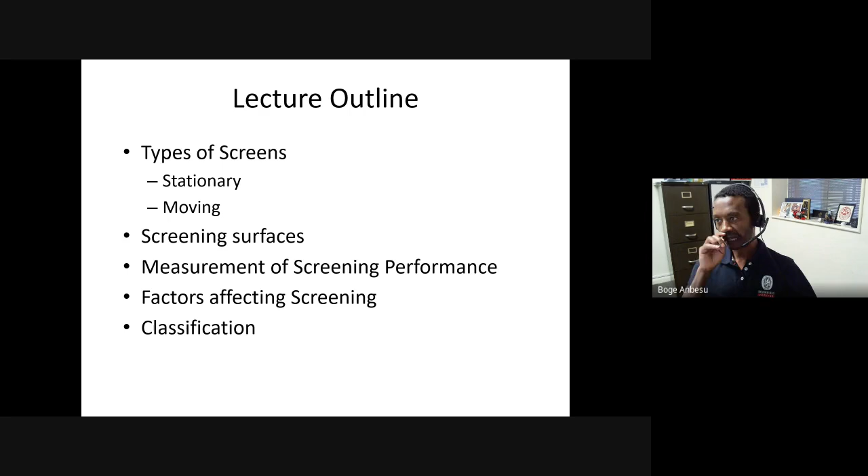Okay, so just keep that in mind when we go through this discussion. But some of this can be transferred and related to other applications, some may not be, some is restricted to mineral processing, but regardless, my focus will be just on aspects related to mineral processing. So we'll talk briefly about different types of screening, and probably focus more on screening operations, what type of surfaces you use during screening of mineral ores, and factors that may potentially affect the performance of a screen. Classification will be a main topic for next week, but this week I'll just briefly touch on some of the theory behind classification. So keep that in mind as well.

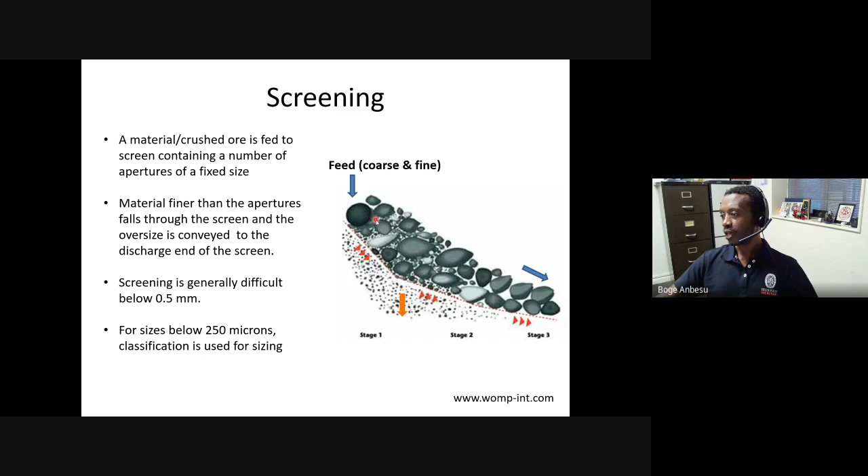So to put things into simple perspective, when we say screening, all we're trying to do is put a screening surface, feed coarse material that should flow over the screen, fine materials should pass through the screen, and basically we split the feed into fine and coarse. That's just the basic principle. There's nothing to it. The fines come down here and are collected as undersize, and the coarse makes its way all the way over the screen surface and is collected as oversize.

When do we use screening? Typically we use it for particles that are larger than 0.5 millimeter, so particles coarser than 500 micron. If your particles are smaller, say around 300 micron, 100 micron, and so on, we don't actually use screens because screens are not efficient for fine particles.

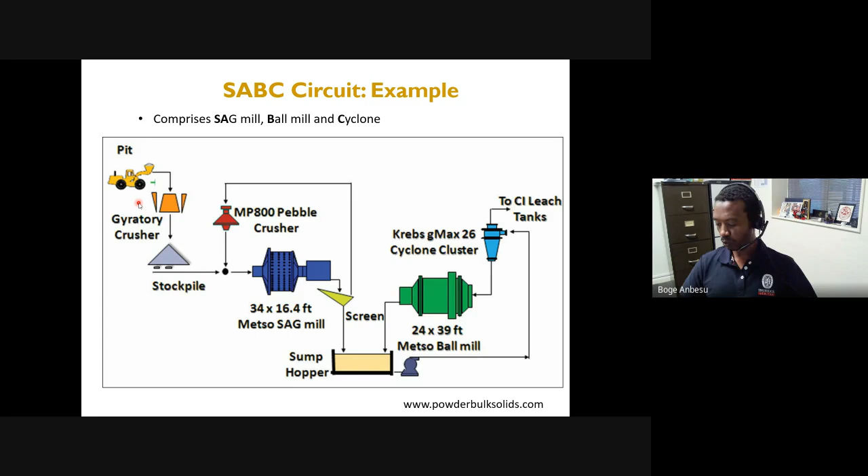In that case we use classifiers. That's why in that previous circuit I showed you, we use classifiers with ball mills, because we know particles are fine there. And we use screens either in the case of primary grinding discharge or in the case of a primary crusher feed, because we know screens work well for coarse particles.

At fine particle sizes, efficiency of screens is very poor because you would need very fine apertures, very fine openings on the screen. And when you're trying to operate the screen at that fine particle size, you blind them very quickly and the efficiency is very poor. That's why classifiers are preferred when it comes to fine particle sizes.

So when do we use screening in a typical mineral processing operation? It could be that you have very light gangue material and small, dense, valuable material, for example. In that case, you can use a screen to separate one from the other.

We can use screening to segregate particles into different size fractions, especially if there's some association between value and waste with size. Sometimes the gangue deports to very fine sizes or very coarse particle sizes based on what kind of material you're processing. In that case, you can put a screen to get rid of the gangue material as quickly as possible.

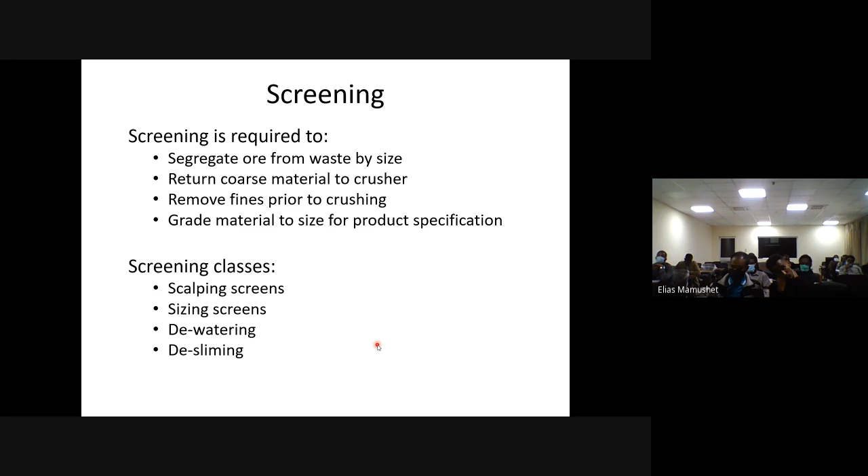If you have, for example, clay materials, very fine materials that are essentially waste, you could probably use a screen to upgrade the ore very quickly. Or, as I said earlier, you want to recycle material to a crusher, removing fines before you crush. And sometimes when you do grinding, we want to separate coarse from fine and operate, for example, a grinding circuit in closed circuit with a screen, and things like that.

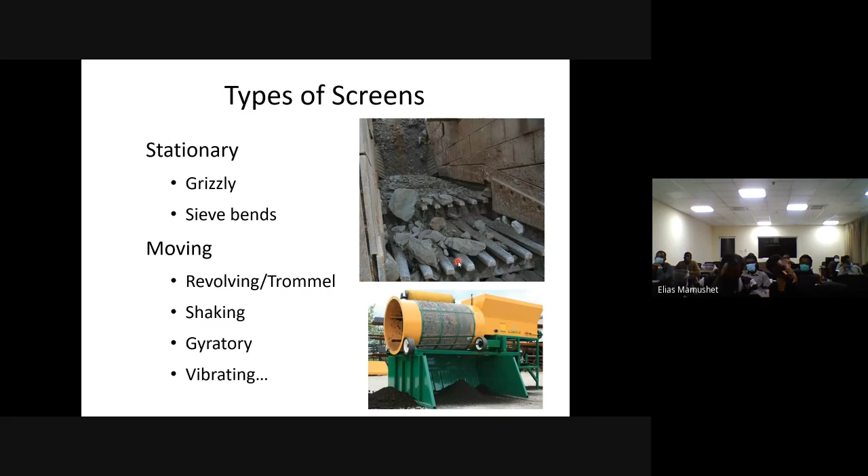There are different types of screens. I think you've probably seen some of these already, so I won't dwell too much on this. Some screens typically used in mineral processing operations are, for example, grizzlies, which look like these, with a bar or metal bar typically. These are usually heavy duty, thick bars used to remove fine particles before we feed a primary crusher. The idea is that they can handle very large rocks and therefore withstand that. They're more resistant to damage and wearing, and therefore can be used for heavy duty purposes.

Sieve bends are another example of stationary screening, where you feed the material from the top and the screen is somehow bent. Material falls on the screen, and the fine particles pass through while the coarse materials flow over the screen.

Some screens are actually moving screens. For example, you could have revolving screens like a trommel, shown here in this picture. The trommel revolves and you feed it from this end, and this is typically your screen. Coarse particles will be retained in the interior of this trommel, fine particles will pass through and are collected here, and coarse particles eventually pass over the screen and are collected here. So you have coarse and fine portions.

You can have shaking, gyratory, vibrating, reciprocating, a number of different types of motions applied to a screen, and typically that's used to improve the screening performance.

So as I said, I'm not going to talk too much about equipment specifically to screening, but if you guys want information about different types of screens, I can happily provide you with resources. I think this is probably covered in another unit. So what I will focus on is different types of screening surfaces that we use in mineral processing operations. Maybe you know some of them.

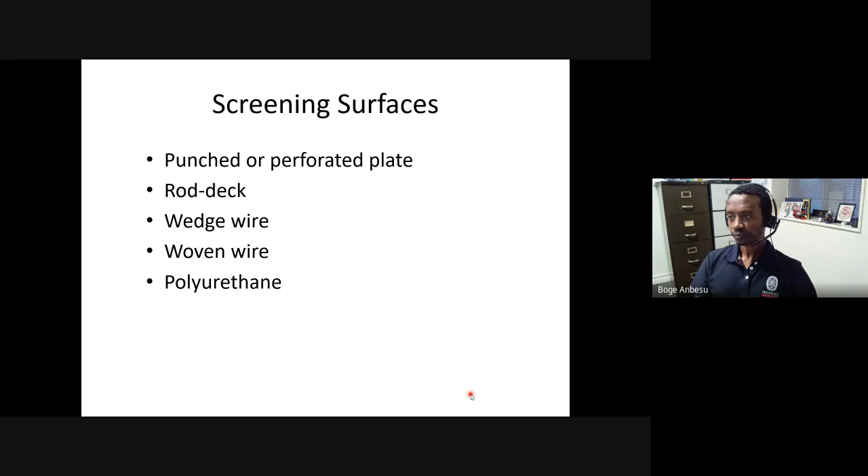Some screen surfaces are made from woven wires. Some screen surfaces are made from rubbers and polyurethane. Some screening surfaces are made from metal bars, as I showed you earlier. And even some can be made from a metal plate where you can punch holes on the surface of that metal. You can, for example, punch circular or rectangular holes on a piece of metal, and that can be used as a screen as well. So we'll talk about some of this in the next slides.

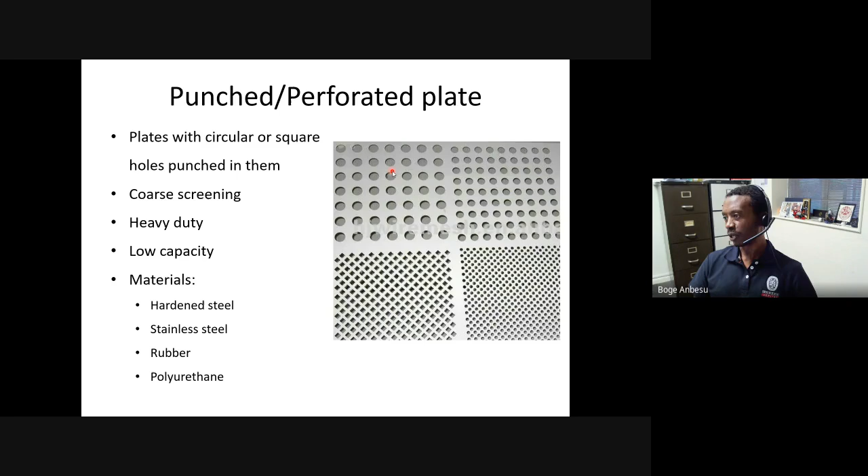If you have something like this for a screening surface, they're heavy duty and resist wearing, but the downside is that they're probably not higher in capacity, simply because, as you can see here, there's a lot of area where you don't have openings. Usually screen capacity is related to the open area available on the screen surface. So when you make holes, you will have open areas, but also there's a large fraction of area that's not available for screening. Therefore, punched or perforated plates usually have a lower capacity compared to, for example, woven wire screen surfaces. But again, the plate itself can be stainless steel or rubber, or any other material.

Again, the rod deck screen — as you can see in this image, you basically line rods in parallel to each other, and you feed material from this end. As the material goes down under the influence of gravity, fine particles will pass through and coarse particles will make their way here, and that's how we separate them from one another. This is a very common screening surface, especially, as I mentioned earlier, when dealing with very large rock. Heavy duty operations can be performed using rod decks.

And sometimes if you have lots of clays, they tend to be very sticky, and that means the screening operation is affected significantly because clays blind the screen surface very quickly. If that's the problem you have, then a rod deck screen is very good, as they have resistance to blinding and so on. They can be used for different types of operations, typically where blinding is a challenge.

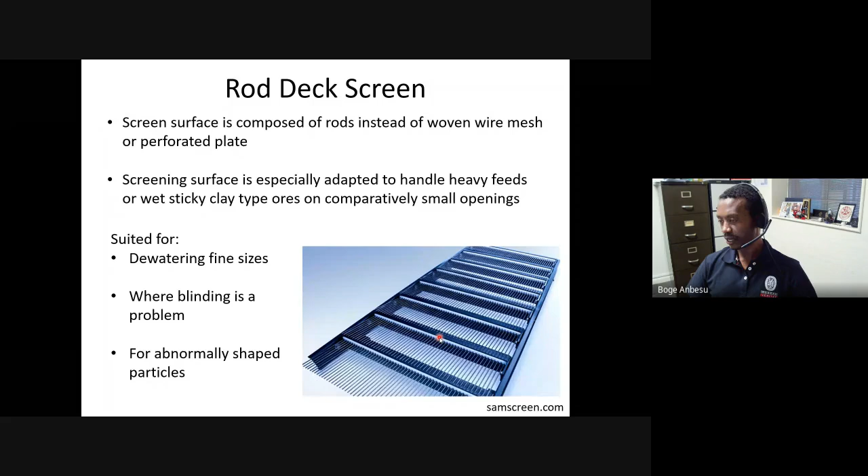Woven wire, probably this is more common in many places. Again, we just use steel, which is drawn into a wire, and then we weave the screen surface using those wires. This picture shows you what is actually going on. Basically, the wires are woven in a mesh-like structure, and the screening surface is simply based on the open area available between the mesh. This can be woven in different sizes.

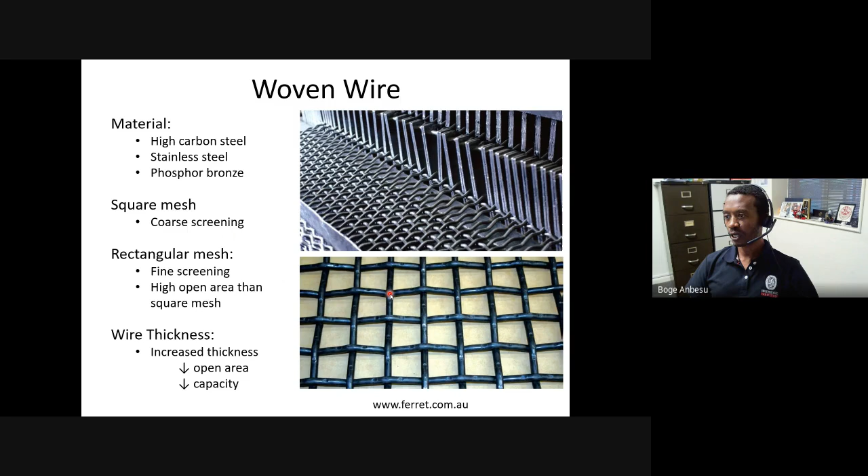These are some things we can do to improve screening operations. The wire can be in a square or rectangular shape, and usually square mesh is well suited for coarse screening, while rectangular mesh is suited for finer screening.

There are a couple of advantages. The polyurethane surface, compared to rubber, is a bit elastic, which means it doesn't blind quickly. This is one advantage of a screening surface, because we know screening performance is significantly impacted by blinding or blockage of particles. When you have blockage, your screening performance reduces very significantly, so you don't want that.

If it's made from elastic material, once particles peg or go through the screen and block, because the plastic is a bit elastic, it actually allows the particles to pass through. That can be a good advantage compared to something made from metal or rubber, and therefore these days modern screens tend to use polyurethane as a screening surface.

Also, compared to rubber, the openings can be accurately cut, which means you have precise screening happening on the surface. And of course, polyurethane is a lot more resistant to wear, so if you have abrasive material, it could be a lot more advantageous compared to any other screen. There are also lower noise levels associated with it. So there are some advantages in using this kind of material for screening.

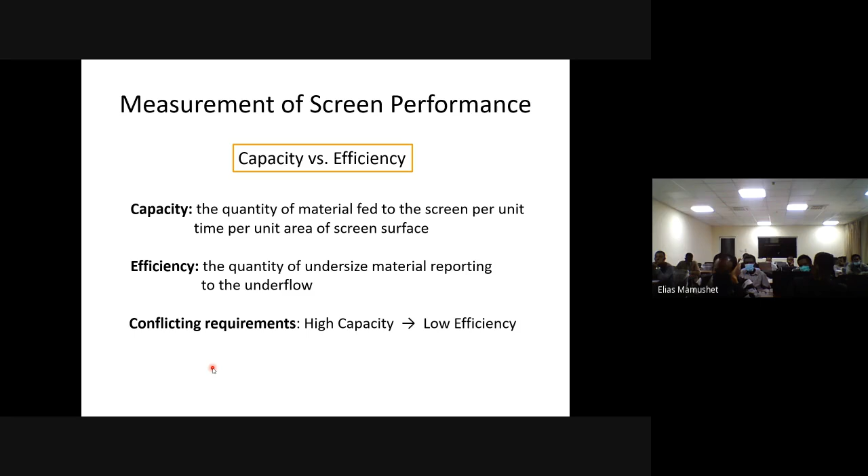If only half of the fines went to the fine fraction, maybe it's not efficient. So we can always track the initial fine material we have in the feed to what we have collected in the undersized material, and we can work out the performance of a screen after that. We'll talk about how we can measure screening efficiency.

So one example would be: I have 1 ton of material to screen. I take a sample from that and do my particle size distribution analysis, maybe using sieves as we mentioned last time. I roughly work out the particle size distribution of the feed material. So from my 1 ton available for screening, I take a few kilograms of sample and do particle size distribution to know how particles are distributed.

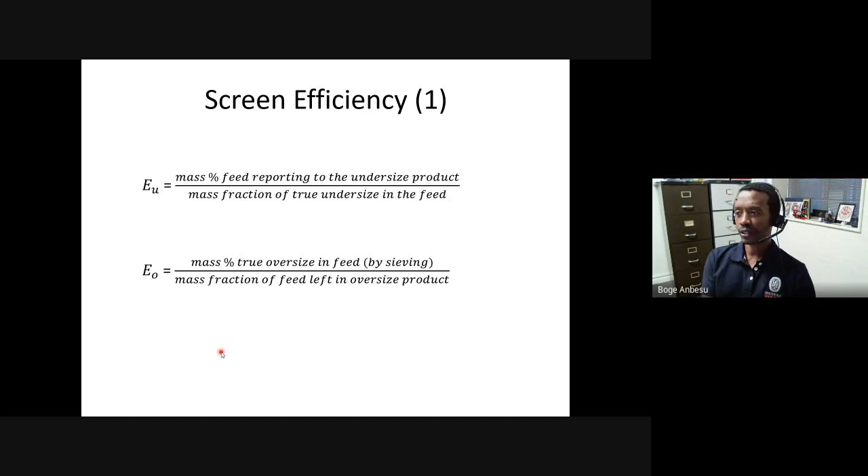If I wanted to measure screening efficiency, let's say of the 1 ton I took 100 kilos. In that 100 kilos, I can work out the proportion of fine material and proportion of coarse material. My separation size in this case could be, for example, 10 millimeters. So I know this much is coarser than 10 millimeters, and this much is finer than 10 millimeters in my feed. This is done through particle size distribution analysis.

To measure efficiency of screening performance, you can use this formula: efficiency for undersized product is obtained by working out mass percent of feed reporting to the undersize. After screening, how much is less than 10 millimeters in the fine portion—I can work that out again by doing particle size distribution. And I already know the mass fraction of the undersize in the feed, because I did particle size distribution initially.

So basically, already in the feed I had this much undersized material. I did my screening, took a sample from the undersized portion—which now has coarse and fine—so I'm talking about the fine. I can measure what fraction of that was actually related to the initial fraction of undersize in the feed. If your screening operation was 100% efficient, that means you started with this much fraction of undersized in the feed, and if all of it passed through the screen, then your screening is 100% efficient.

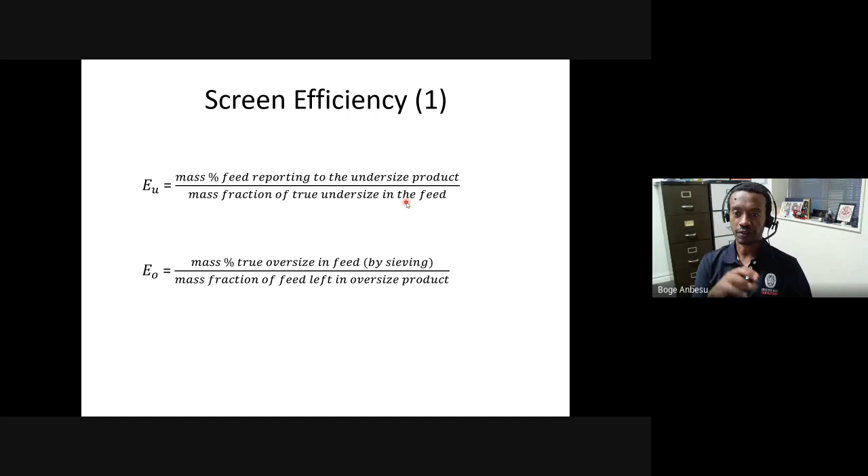But in reality, some of the undersized material will go with the oversized material because you probably have blocked the screen. Instead of passing through the screen, some fine material will still report with the oversize. So you can't collect 100% of the fine material in the undersized fraction. That's why we track undersize in the product and undersize in the feed, and work out the percentage to determine efficiency.

Not only the undersize, you can also track the oversize. Again, I have this much amount of oversize in the feed. Now I perform my screening operation and take a sample from the coarse fraction after screening, and I can then determine screening efficiency. Obviously, for the oversize, if the screen is damaged, some coarse particles may fall through the screen, and that may reduce the efficiency of your screen.

Typically, when we do screening, we track the undersize, because people tend to assume oversize shouldn't pass through the screen anyway. So if we track the undersize in the feed and the undersize in the fine portion, we can work out screening performance. But as I said, you can also track the oversize as well as the undersize.

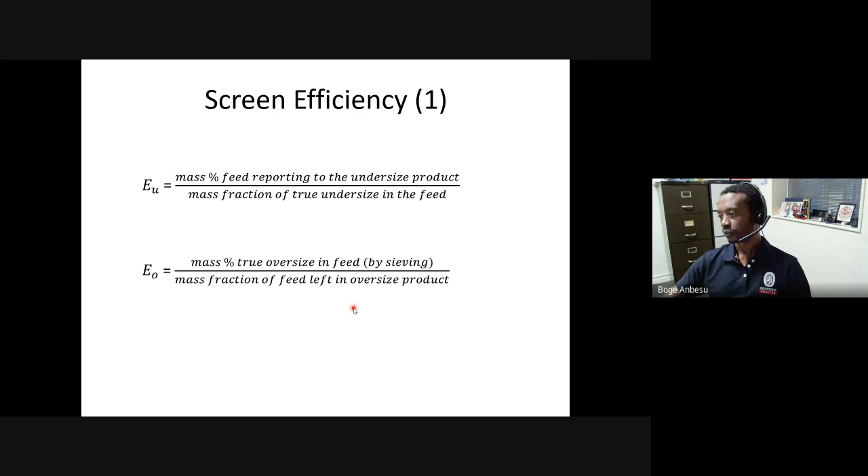Another way of determining efficiency of a screen is using a mass balance operation. If you remember last time, we can use mass balancing to track flow of water in the circuit, to track solids flow in the circuit. We can try to follow a particular component—for example, in a copper plant, we can follow the copper in the circuit, where it's going from and to. We can even track particle sizes from, say, feed to the crusher to whatever comes out of the crusher, and so on.

And we can follow the same thing for a screening operation as well. So for example, you start with a given mass of feed going into a screen, perform the screening operation, and collect the overflow, oversize, and undersize.

Okay, so I can then weigh them. Weigh the oversize, the undersize, and the feed. If you did that, you have F as mass of the feed, C as mass of the coarse material, and U as mass of the undersized material.

Basically you split material into two, fine and coarse. But in each of those, in the feed, I can track the fraction of oversized material. So when I say oversized, if my screen opening here was 50 millimeter, that will be my separation size. So I will say in the feed, this fraction was coarser than 50 millimeter. That's why we can say coarse material in the feed is represented by small f.

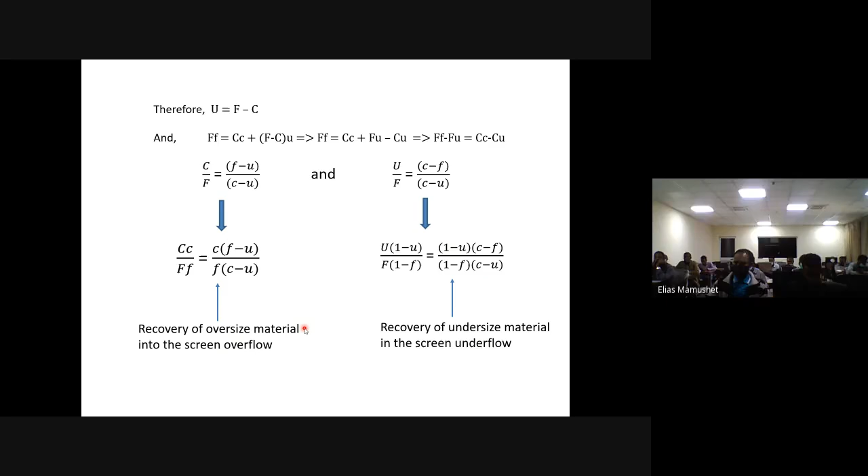As you can see here, the use of accurate particle size distribution is very critical because we're basically relying on particle size distribution of the feed, particle size distribution of the coarse portion, and particle size distribution of the fine portion. So this is one way of doing this.

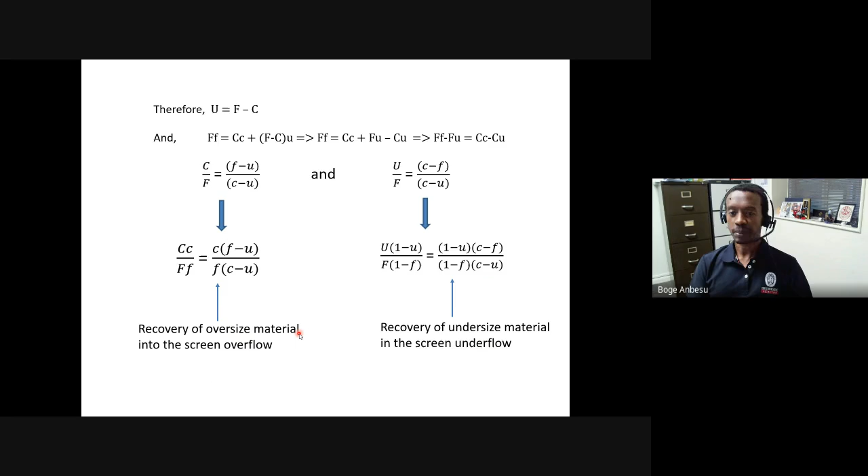And again, next semester, probably when we talk about separation and mineral processing techniques, recovery and grade are very critical. So again, we use exactly the same formula to work out recovery of minerals or working out the grade of a concentrate, for example, after a separation operation. So these are common mathematical formulas we use for those kind of scenarios.

So again, overall efficiency, the combination of recovery of oversize and recovery of undersize, can be done using this equation here. And if you look here, you can assume, if I say actually my screen is very intact, there is no breakage or deformation on the screen surface, we're basically saying oversizes shouldn't go here. If particles are coarser than, as I said earlier, 50 millimeters, they shouldn't come here.

So you can say actually the U here can be taken as 0, no oversizes in the fine portion. If that's the case, you can simplify this equation into this one here. And you say efficiency is dependent on coarse fraction in this case, coarse particles above 50 millimeter in my example, in the coarse component after screening, and these are coarse particles in the feed, divided by 1 minus the fraction of coarse in the feed, multiplied by the fraction of coarse particles in my overflow after a screening operation.

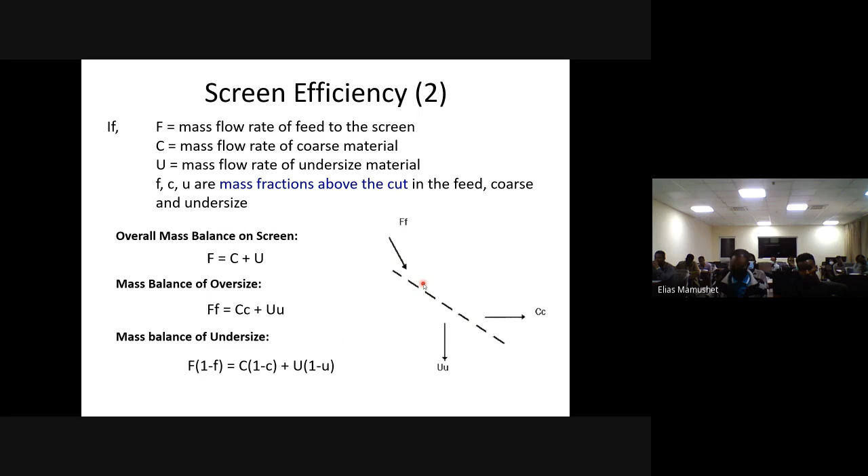In these two examples I've shown you, we're assuming you feed everything to the screen and assume particles behave ideally. For example, if this was a 50 millimeter aperture size, I'm assuming a 49 millimeter particle should pass through. But in reality, unless you present that particle perfectly, a 49 millimeter particle doesn't pass through a 50 millimeter screen, because it's very close in size and simply bounces off, reporting to the oversize.

So this assumption of screening efficiency calculation relies on the fact that every particle smaller than the screen size should pass through, which probably isn't the case in reality. The Tromp curve, or partition curve, accounts for this. It assumes that if particles are very close in size to the screening or aperture size, chances are they're not going to pass through, so we need to account for that.

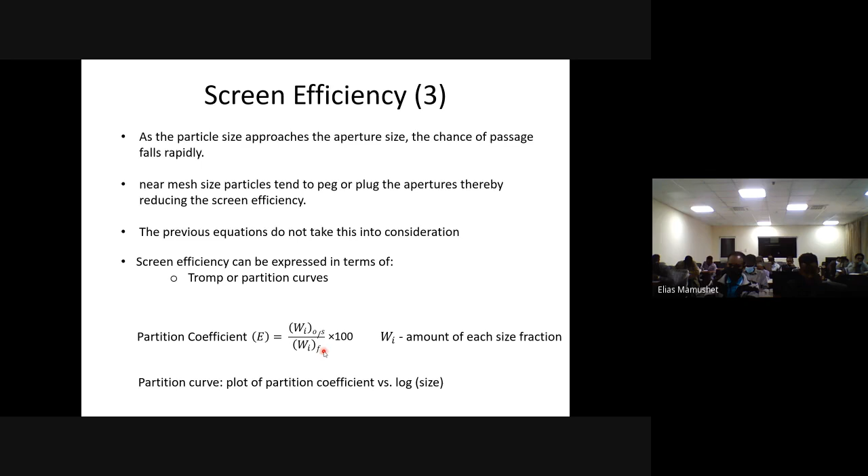The partition coefficient can be obtained by working out the fraction of any given size in the oversize relative to the fraction of that same size in the feed, multiplied by 100. This statement may be confusing, so let me go to the next figure and show you what I mean.

Let's say you have particles anywhere from 1 millimeter to 1,000 or even 2,000 millimeter, distributed all over your sample. In this case, let's say you choose a screen of about 200 millimeter in size. Your assumption will be that particles smaller than 200 millimeter pass through, while particles coarser than 200 millimeter flow over the screen and report to the coarse fraction.

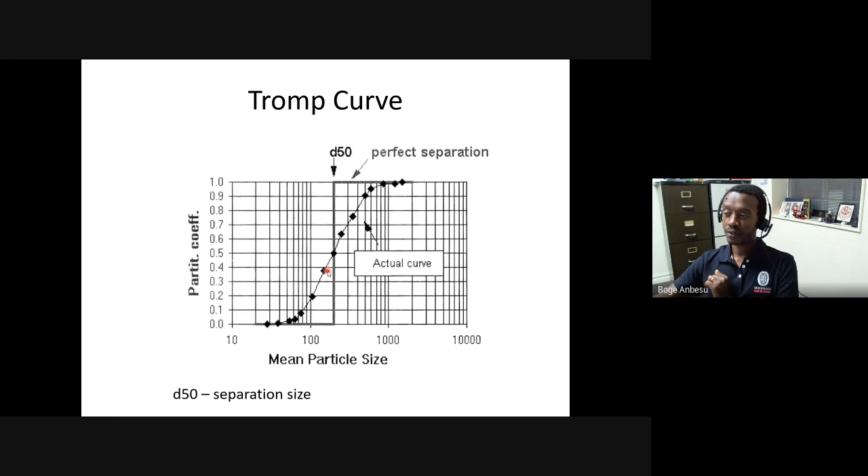In reality, if particles are very close to 200, say 180 millimeter, those particles have a hard time passing through the 200 millimeter opening, because particles usually cannot be presented perfectly. Some will pass, but some will not. So what the Tromp curve tells you is for any given size, Wi.

On the x-axis, for a given size, say around 250, although you'd expect all the 250 millimeter particles to report to the coarse fraction, this curve is saying only about 65% actually report to the coarse fraction.

The same is true here. If I take particles about 100 millimeter in size, and my screen is 200 millimeter, although these particles are only 100 millimeter in size, about 20% of them are not reporting to the fine proportion, but instead reporting to the coarse proportion.

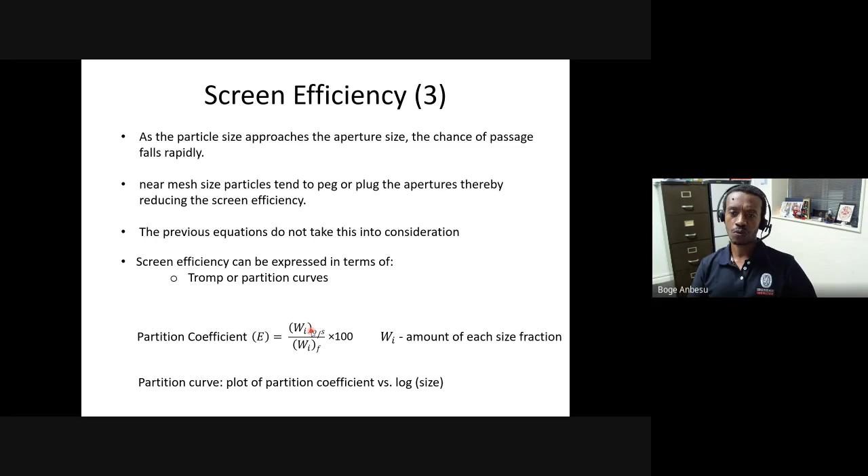Naturally, we'll expect the fines to go to the fine proportion, so we expect 0 to go to the oversized portion. And the coarse particles, we expect most of them, obviously, to go to the coarse fraction.

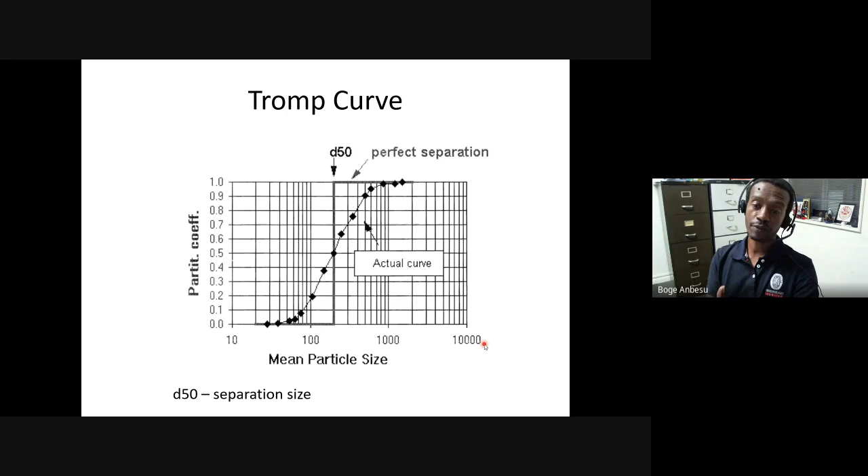Usually the fines are the ones which determine efficiency, because we expect all the fines to go to the fine portion and all the coarse to go to the coarse portion. But what happens in reality is some of the fines will report to the coarse fraction. So if too many of the fines report to the coarse fraction, then your screening is very poor.

And that's why we can use this curve. The more this curve is close to this perfect separation here, the more efficient your screening performance is. If this curve is very far from the ideal separation curve—if you can follow this arrow here—if it looked something like this one, then I know the screening performance is very poor.

So what I'm telling you is, if you give me the screening operation you've done—this is the feed, this is the product, and this is the sample from the fine and coarse—I will just construct a partition curve, and I can tell you that the screening performance is good or bad, just based on what the curve is showing.

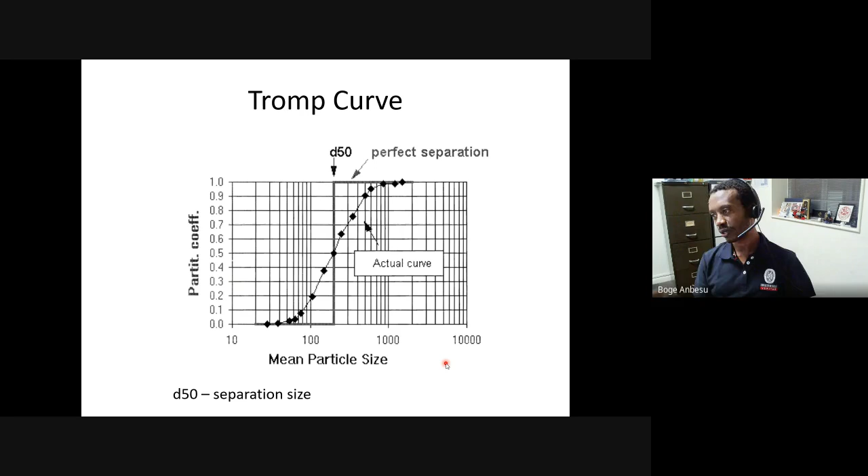I'm not sure how much of you were following. Maybe this can be slightly complicated, but I will do an example on this particular issue next week on simulated data, so hopefully that will make things a bit clearer as we go. Don't stress too much if you're not really following what I'm talking about. At least understand that there are a few ways of working out screening efficiency, and the Tromp curve, or partition curve, tends to be one of the better ones.

Your D50 here is the size where the screening is being performed. So if I say my screen has an aperture size of 100 millimeters, that will be my screening size. Smaller particles than 100 will pass through; coarser particles than 100 will overflow and be collected as the coarse portion. So how about if I have particles that are exactly 100 millimeter?

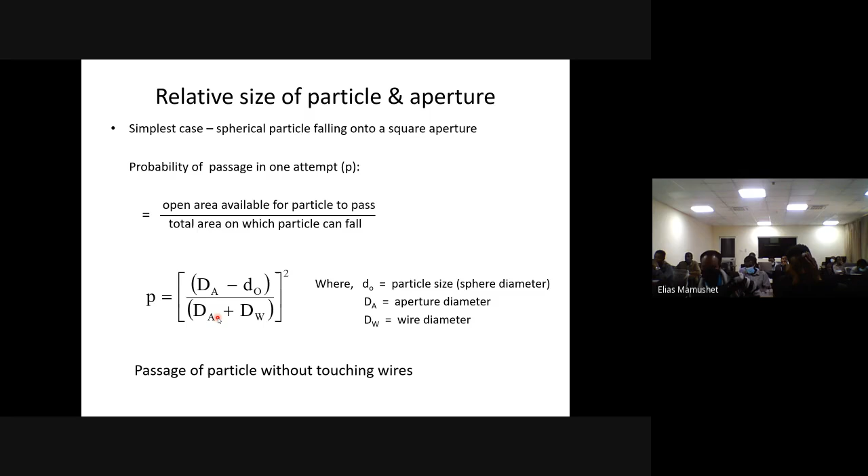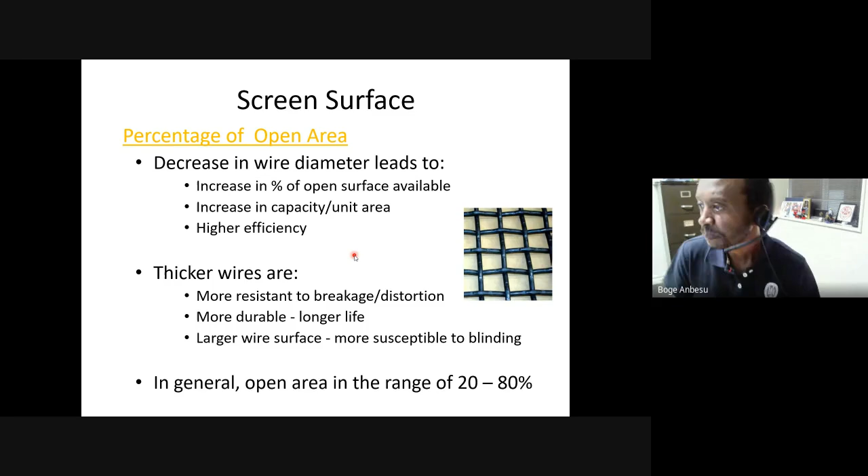Obviously, another factor, as I said, is how much open area you have. If you reduce the wire diameter, automatically what I'm doing is increasing open area. Open area available will depend on the wire diameter. Thicker wires mean you're blocking more of the open area; thinner wire gives more open area for screening to happen. So that's why we say a decrease in wire diameter will lead to more open area, and that more open area should help the screening, should increase capacity, should increase efficiency.

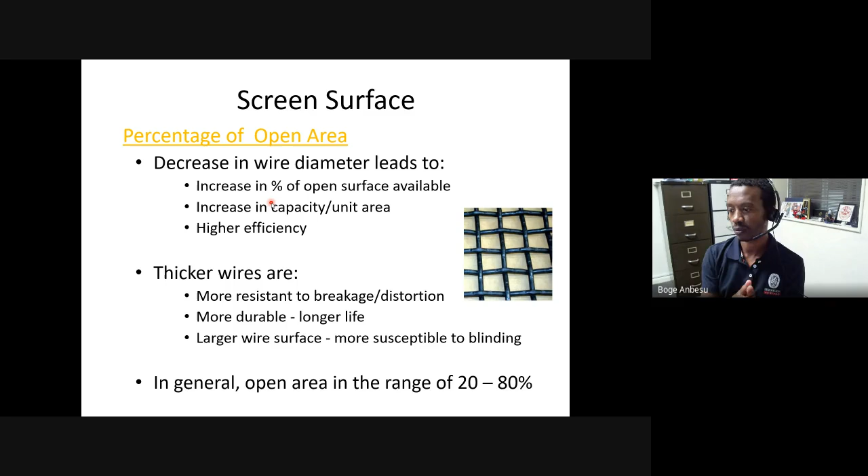So where are the times when you can make the screening surface from thick wires? That's when I'm dealing with very large rocks, when I'm dealing with abrasive rocks, okay? When particles are falling from a height, they can easily damage the screen. So if that's the case, I need to make the screen from thicker wires, and those are the cases where that can be applied.

Shape of the opening on the screen can be any shape - rectangular, square, circular. That depends on what I want to do. If my particles are elongated, very irregular shaped, rectangular screens are good. If I want to do very accurate sizing, I will use circular openings. So depending on the operation, you can choose different aperture shapes, and those will serve different purposes.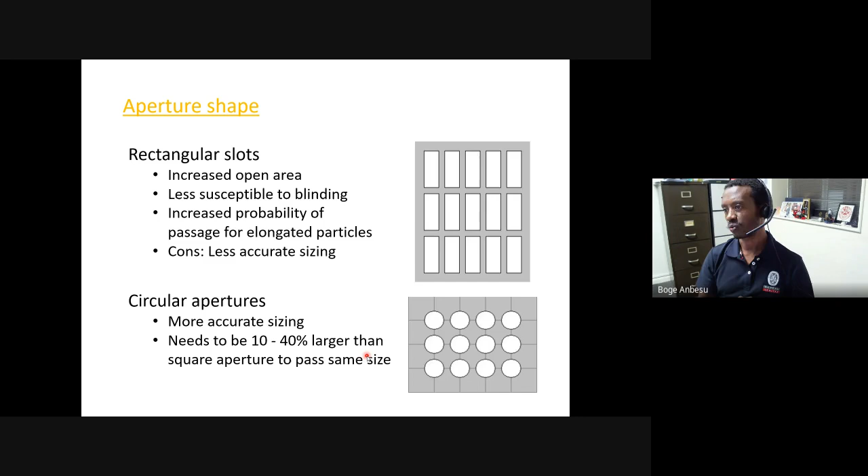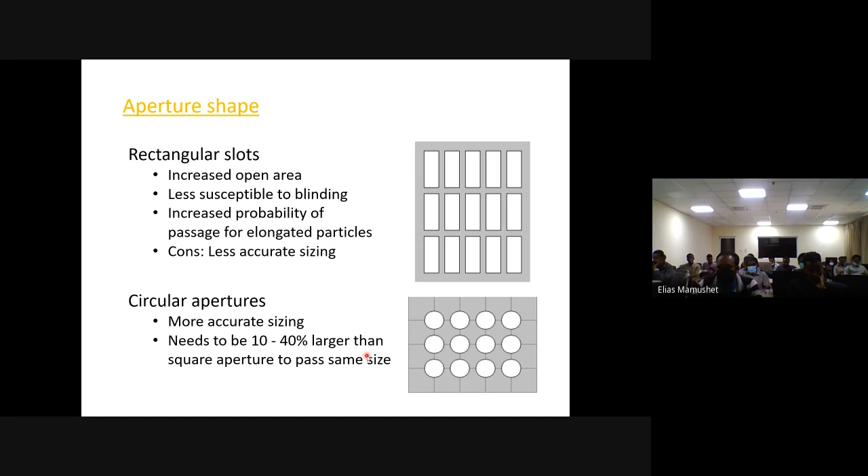But of course, you need to be aware of the limitations of each of these. For example, if you have circular apertures, that will mean you have a small fraction of open area, and the capacity reduces significantly. So either you need to increase the area of the screen itself, or you need to run it quickly to compensate for capacity. In any case, you need to consider the pros and cons of different screen shapes.

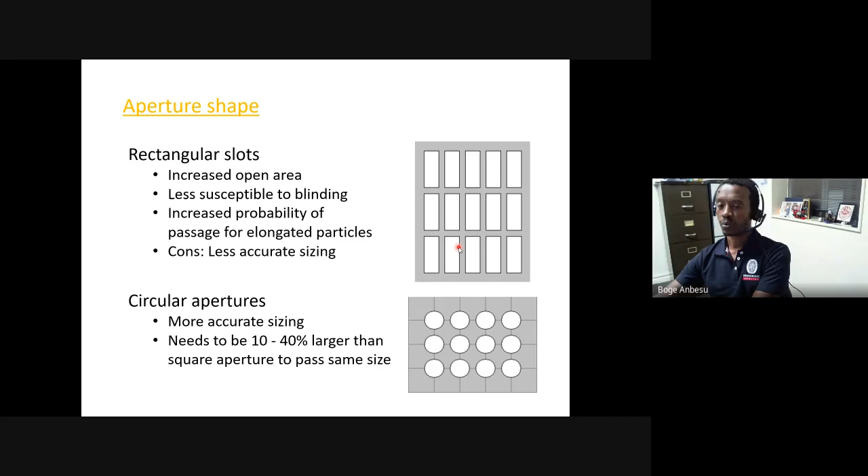Again, how do I orient them? If I have rectangular shaped openings, you can use it for elongated particles because it gives you larger efficiency. If screening was done this way, I also increase the capacity of, for example, a rectangular screen. These are some minor things you can do to adjust for increased capacity. If I want some balance between efficiency and capacity, rectangular openings or slots can be made perpendicular to the screening direction to maximize efficiency as well.

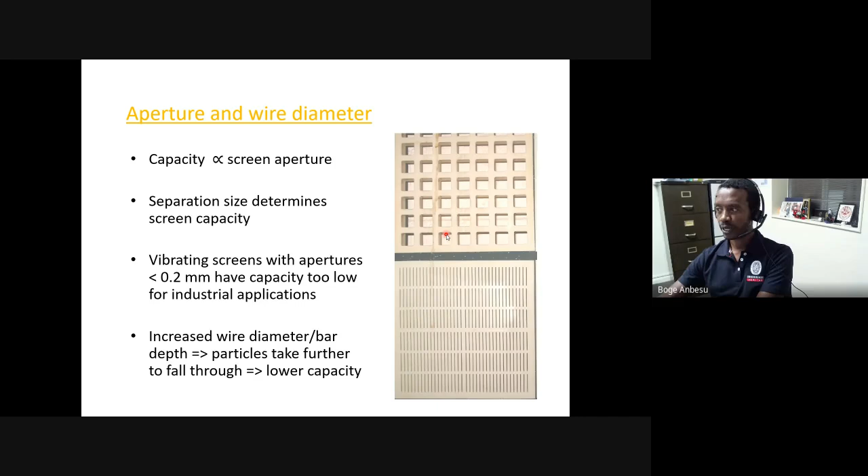So I mentioned about diameter earlier. The main issue with wire diameter is open area. More open area for thinner wires, less open area for thicker wires. Obviously, thicker wires will have lower capacity.

Another factor is length and width of a screen. You can make the screen itself either very wide or long. If I say long screen, then I'm giving particles a good opportunity to pass through. So when length is really long, particles spend more time on the screen surface, so my efficiency improves significantly. But on the downside, capacity decreases. That's one impact of having a longer screen. The width obviously increases capacity, but usually doesn't have much effect on the efficiency of a screen.

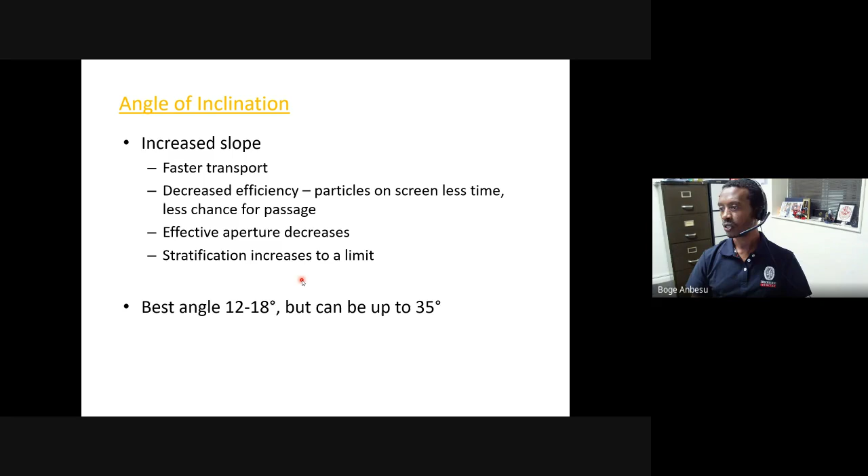Angle of inclination - as I showed you earlier, grizzlies are inclined, and that is usually used to help particles fall under the influence of gravity. That actually helps with transport of particles from the feed end to the product end. If you incline it too much, particles pass through very quickly. Maybe you reduce efficiency, but you improve capacity. And inclination also helps with particle segregation and stratification, which can be beneficial to improve efficiency.

Again, I mentioned about screen movement. What's the main purpose of screen movement? It's all to do with presenting particles in many positions, giving them a chance to pass through the screen. It's basically lifting it up and down on the screen. As you do that, you can do quick frequency up and down motions, or you can make it longer, so you actually lift particles higher in the air and they fall back. So you can do either faster or longer strokes. Either way, you are helping particles pass through the screen, and that can increase efficiency significantly.

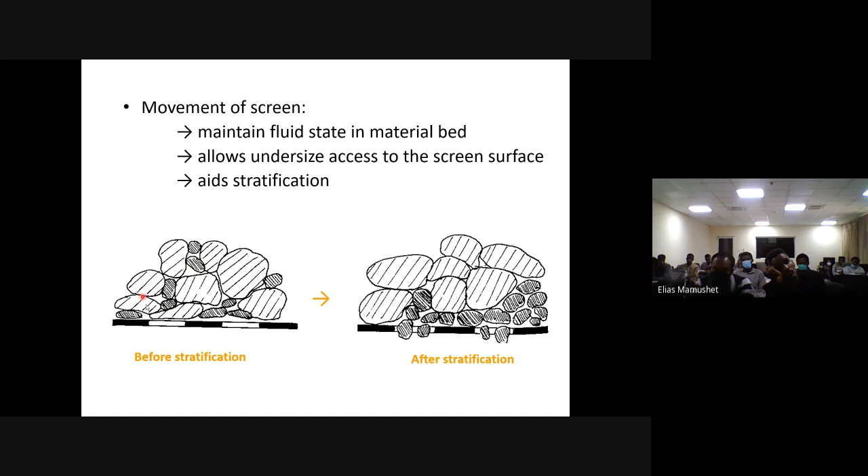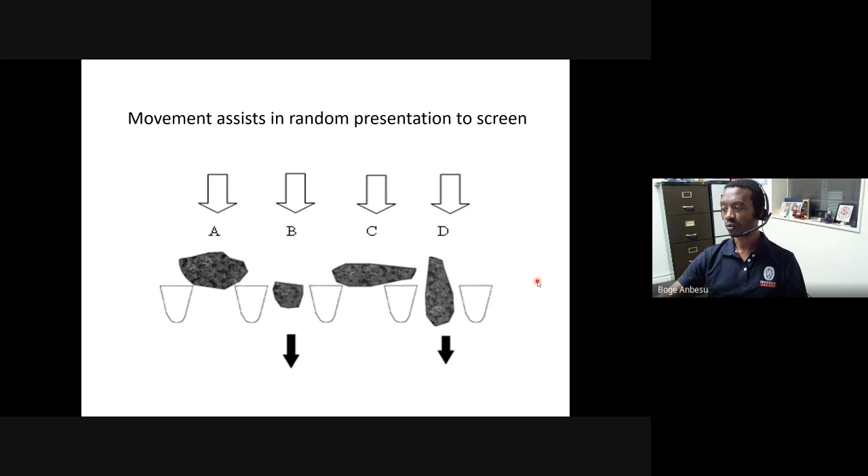As you move the screen, as you shake it, fine particles will make their way down to the screen surface and pass through. Movement helps with stratification, and stratification helps with higher or better screening efficiency. This shows how movement can assist particles like this one. If you don't move it, it will simply go to the oversize. But if you lift this particle up and down, eventually it can be presented nicely and can easily pass through the screen surface.

Depth of bed, this is how you load the screen. You can give it too much material and overload the screen, or feed it in a very thin layer. Either way, there are different consequences.

So, at the feed end, you have fine material and coarse material all clogged together. Unless you apply some motion, or unless particles make their way down on the screen, screening is very poor there. After a certain amount of time, as particles move down the screen, they segregate so that fine particles make their way down through the coarse particles and are eventually presented to the screen surface and pass through. Towards the end of the screen, only coarse particles are left, since fine particles have passed through and coarse particles roll over and report to the oversize.

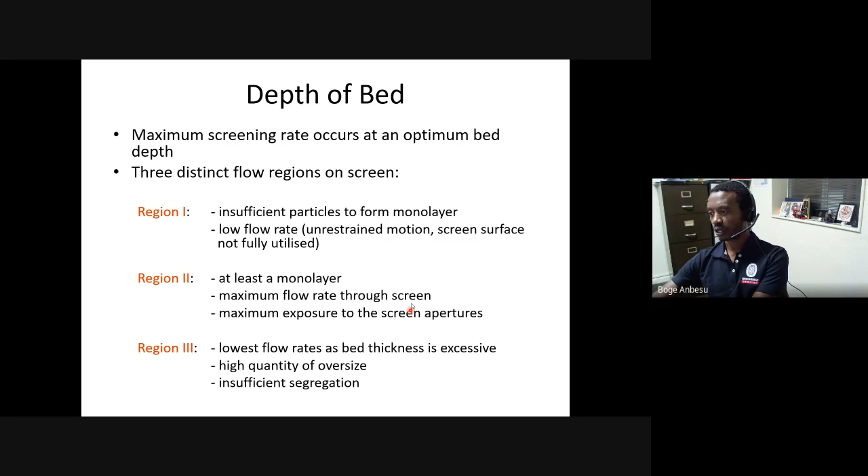So what do we need to do? We need to maximize the operation of region 2, the zone of screening, so that fine particles make their way through and are screened out. This slide is talking about the differences between those three regions. In the last region, there are insufficient particles, only coarse material is left, and no screening is happening. Region 2 is where screening actually happens, and region 3 is the insufficient segregation region. You can read more about that on your own time.

In general, if I want to maximize my screening operation, I would like to maximize region 2. This can be done, for example, by decreasing the slope of the screen. When I decrease the slope, particles spend more time on the screen instead of moving quickly and reaching the end too fast. If I move the particle slowly, I give it a chance for region 2 to be created, which helps maximize screening efficiency.

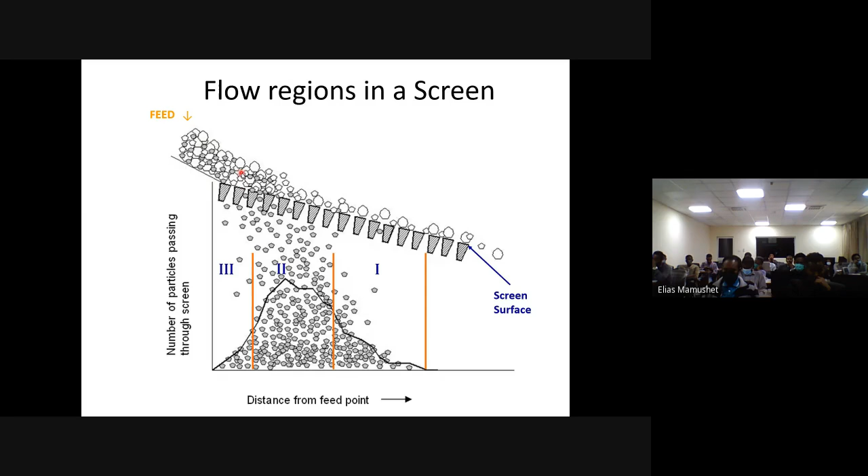Another factor is not overloading the screen too much. Yes, feeding a lot of material increases capacity, but if everything becomes very crowded and this region stays long on the screen, nothing happens there and your screening performance will suffer.

The last point is moisture. When I talk about how moisture affects screening, if the material is completely dry, screening is usually okay. If I'm doing wet screening, again it's not a challenge. But when you have a small amount of moisture, maybe 1%, that's when you actually have a problem. So it's not dry or wet material that's the issue, it's material with some amount of moisture in it that creates the problem.

The problem is usually related to blinding. If this was your screen, with one wire here, one wire here, and so on, a bit of moisture in the sample causes fine particles to start sticking on the wire. Over time, the fine particles build up and eventually block the opening. So you get a large proportion of blinding of the screens happening, and if that's the case, we call that plastic blinding.

The other cause or problem is if I have a small amount of moisture, fine particles will start sticking together, and eventually these particles will make a lump, a very large lump like this one. And as this goes to the screen, it blocks the screen, and that's called blanket blinding.

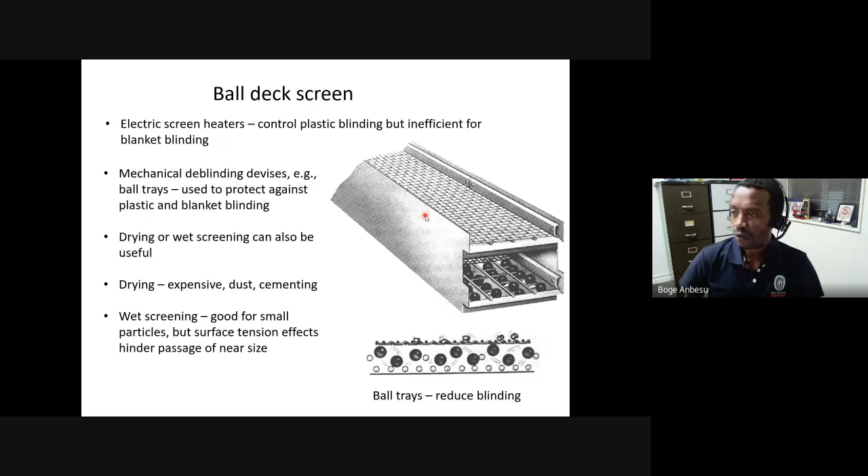For example, one of the mechanisms we use for avoiding blockage of a screen due to moisture is heating the surface of the screen. If I heat the wire here gently, then you prevent this from happening. That can be an advantage to control plastic blinding. Obviously, if I just heat the wire, this can still happen before I start screening, but at least you can prevent the plastic blinding if you heat the screen surface, or you can use mechanical means.

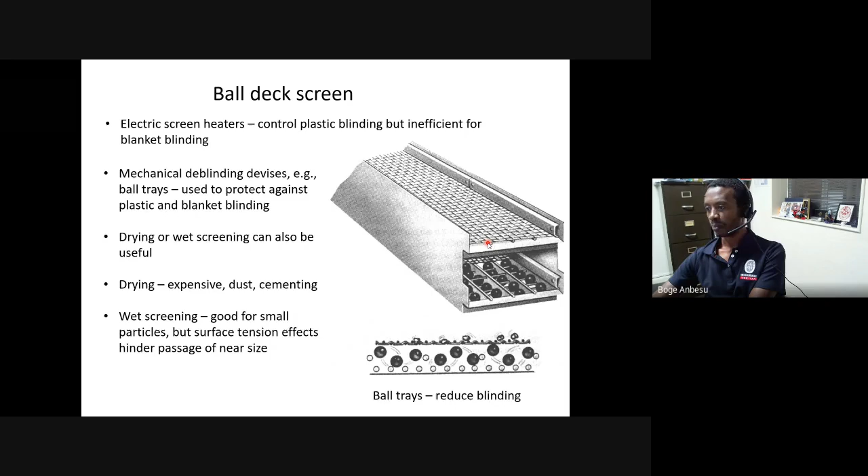For example, we use ball trays that are lifted up and they hit the screen from the bottom. As they hit the screen, they disrupt some of the blinding happening on the screen, and that can be used to reduce blinding. Obviously these are extra operations which cost you more money, so you might as well just do either completely wet screening, or dry screening, to maximize your screening efficiency.

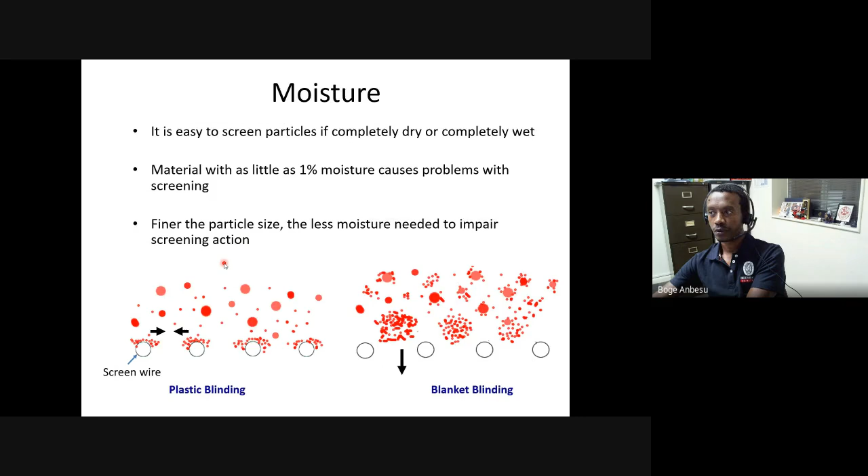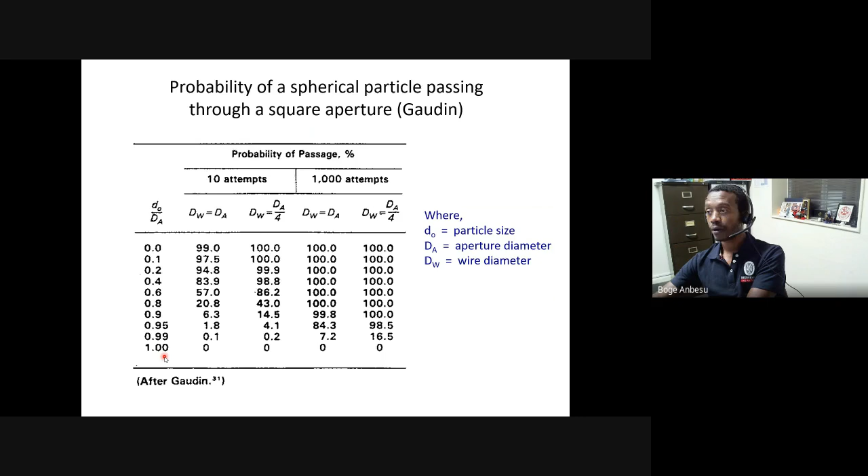So here, what we're trying to say is, let's compare something made from metal and something made from polyurethane. If something is made from metal, it's very rigid, especially if made from a thick woven wire. So if a particle goes there and blocks it, it will be stuck there. There's no mechanism of removing it easily. So basically, if you have too many openings blocked like that, your screening efficiency and your screening capacity will suffer significantly.

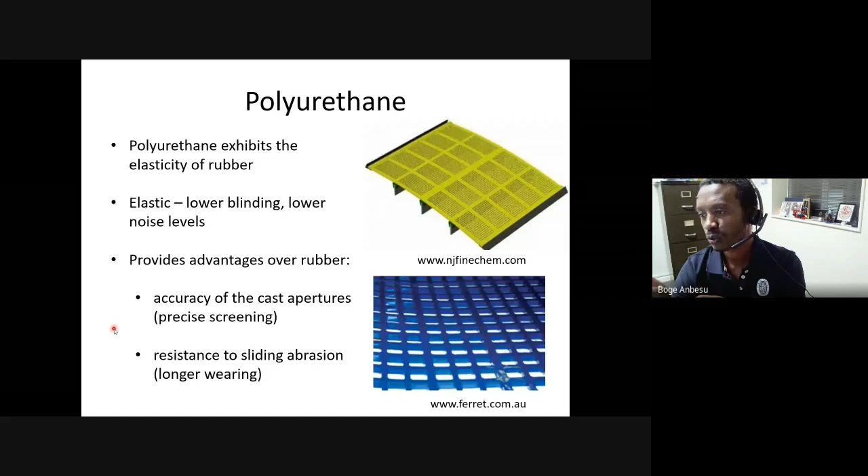But when it comes to something elastic, like polyurethane, if something goes into the opening and is momentarily stuck there, because it is elastic, and we also have vibration applied to the screen, and because particles are also falling on it constantly, usually what happens is that stuck particle will be forced to pass through, because the polyurethane is very flexible. So it stretches, and when it stretches, the particle passes through. That's why we say it has lower blinding ability. It doesn't blind very quickly, it doesn't block very quickly. Even if something was blocking it, particles can pass through.

Obviously, at the same time, you don't want your screening to be affected if everything is too elastic. If polyurethane stretches too much, you are allowing coarse particles to pass through as well, so that can be an issue.

But in this case, the polyurethane is accurate enough, because when you put the holes on the polyurethane, you can cut them very accurately, and it is not so elastic that it lets coarse particles pass through, but it is elastic enough to prevent blinding or blockage. So it's actually a hard material, not that easy to stretch. It's not a stretchy material to start with, but it gives you both the advantage of reducing blinding and the advantage of accurate screening.

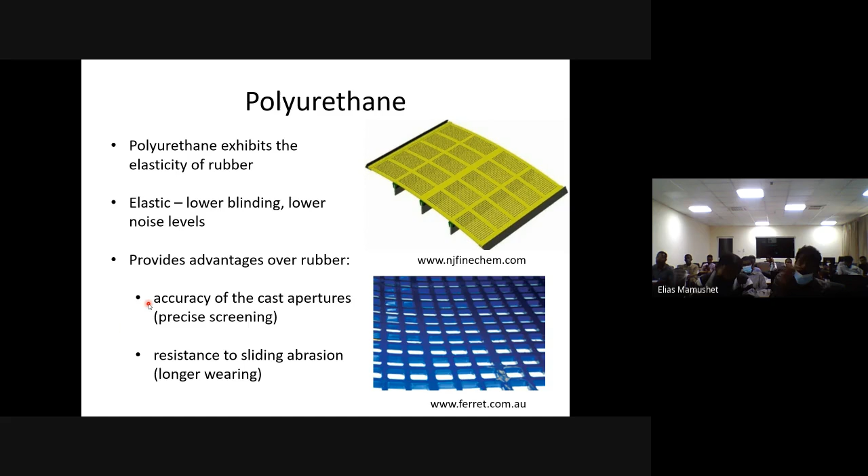Another question: regarding the number of factors that will affect our screen device, you've mentioned these factors already. So how can we optimize those factors to get the target separation size? I think it will be good to look at each of them individually.

As I said, for the case of relative size of particle to aperture: if I am going to select a particular screen for my operation, the first thing you work out is the capacity of the screen, which is more dependent on equipment specification. From an operational point of view, when I want to pick a particular size for screening, let's say 100 micron, I'm removing particles coarser and finer than 100 micron. I need to first look at my feed.

I need to look at my feed composition in terms of particle size, and I need to know how the particles are distributed. I need to avoid, for example, if 60% of my particles are very close to 100 micron, I shouldn't pick 100 micron as a separation size. So that's why you need to first work out your particle size distribution and determine the size where you're going to conduct your screening operation.

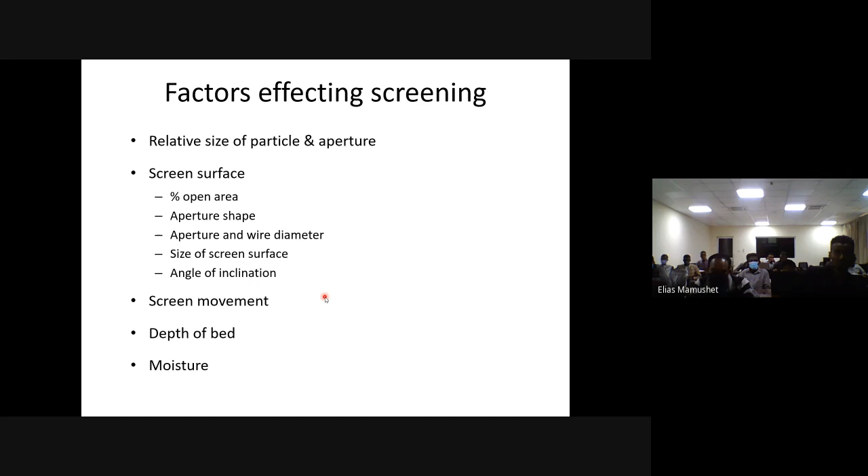So let's continue our discussion on particle settling. Probably when I talk about this, I am maybe a bit preempting into classification because most of this is applied to classification, which I'm going to discuss next week. So I wanted to just raise these points here to prepare ourselves for the next lecture.

As I mentioned, classification is applied more to smaller particles because if particles are, say, below 250 micron, usually screening is not as efficient and we typically use classifiers. The reason is classifiers usually use some kind of media and are usually operated in water, so particles are suspended in water, and particles finer than 250 micron can easily move in water, maximizing separation. If you just use a screen and particles are really fine, they just lump together and don't segregate from each other very well.

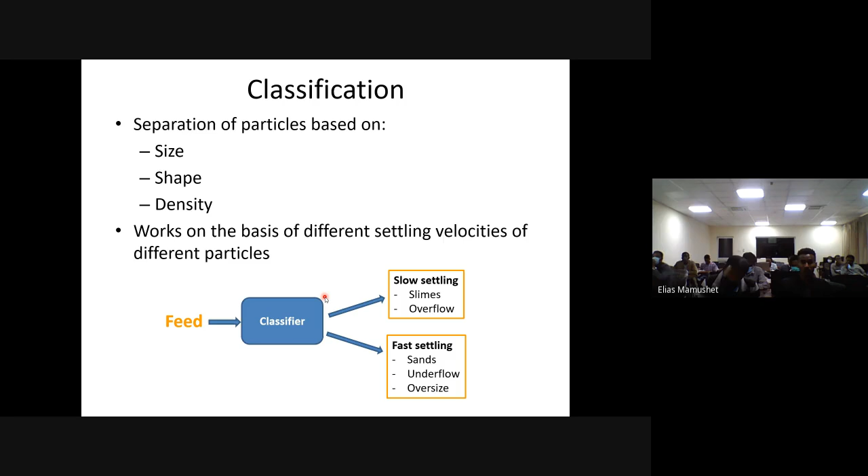Sometimes dense particles can act the same way as coarse particles. If you spin particles in water with some motion applied, particles will attain centrifugal force. Usually the dense particles will start to attain centrifugal force just like coarse particles, and therefore small dense particles can go with coarse large particles, depending on the density. So that can be very critical.

Shape can again be critical. Flat particles float easily on water, for example, and can be carried easily with water even if they're coarse, large particles. If they're flat, they can be easily removed to the overflow, and they can report to the wrong portion. So in classifiers, although we mainly exploit differences in particle size, we can also sometimes use differences in density and so on to result in separation.

So you have a feed. Hopefully the feed has coarse and fine particles, and that is split into fine particles because fine particles are slow settling. If you're using a typical classifier like a cyclone, they report to overflow. Fast settling particles are those that are large, or maybe oversized. By using a classifier, the idea is to separate particles into large and small, or fast settling and slow settling. Whether a particle is fast settling or not depends on its size, its density, and so on.

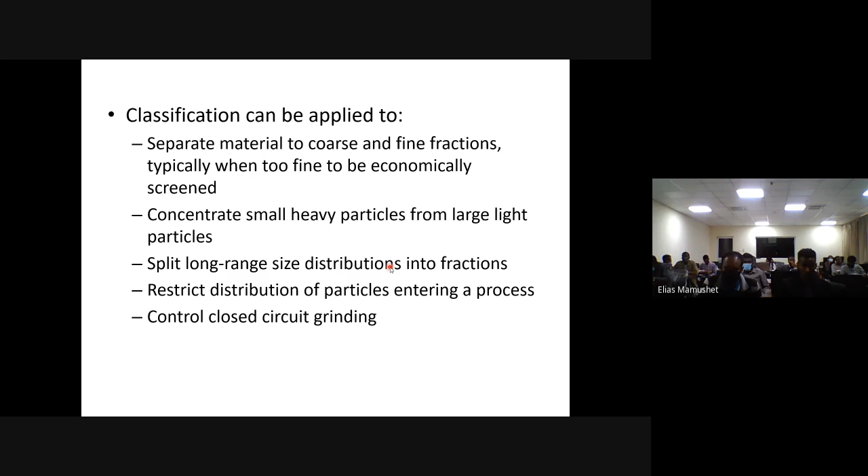Classification can be applied in many cases. In the flow sheet I showed you earlier, for example, it's used in closed circuit with a grinding mill. Coarse particles are recycled back to the mill using a cyclone, which is a classifier. Fine particles are sent to the subsequent processing stage.

It can be used to control grinding, but maybe we just want to split particles into fine and coarse simply, with coarse sent to one processing regime and fines sent into another. So you can put a cyclone next to a mill, split them into two, without the need for regrinding. You can just split and send them into different directions. For that, you can use classifiers.

And maybe you have light and dense particles. Again, you can also classify them. It can be applied for a number of different reasons.

So what determines the performance of a classifier, or how good your classifier works? It depends on how particles move inside the classifier. You can make particles crowded. If you're feeding, for example, a material which is 70% solids, you already have too many particles in that feed material.

And you have particle-particle interaction, which can easily affect your separation performance. If particles are not 70% solid but you're feeding only 10% solid with the remainder water, particles are free to move in the separator. So by varying operational factors, you can either make it difficult for particles to move inside the equipment or make it less difficult, and that depends on a number of factors.

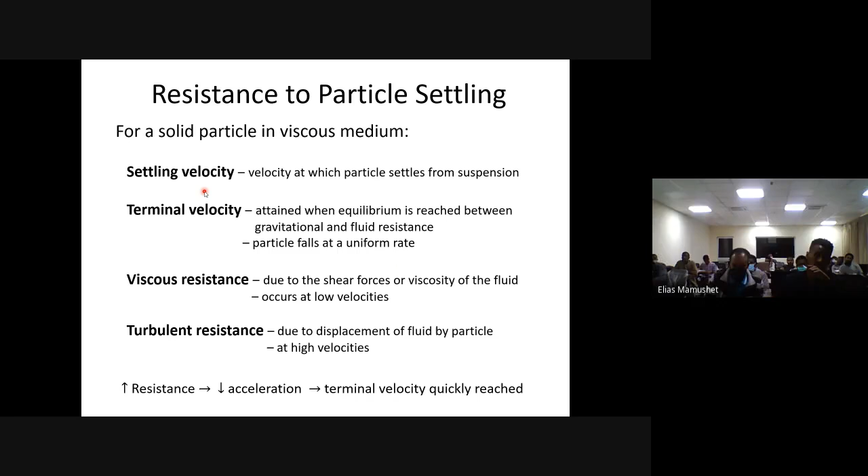If I have a viscous medium, for example, instead of water—you can use dense media for separating particles—if that medium is too viscous, you're again making particles difficult to move, and viscous resistance may be prominent in typical equipment. Or maybe it's actually turbulence: when a particle moves in a liquid, it displaces the liquid, and that may also present resistance to flow. So you could have either viscous resistance, mainly due to fluid viscosity, or turbulence resistance, due to displacement of the fluid around the particle.

These forces will play a role when you're trying to split particles into coarse and fine, or into heavy and light. Generally, if the resistance is high, your particle acceleration is reduced, and the terminal velocity will be attained very quickly.

In case of free settling, we're looking at a situation where the percent solid is less than 15%. Particles are free to move, there is no crowding, and therefore you could say that Stokes' law and Newton's law can be obtained using those two equations. In this case, Stokes' law mainly assumes drag force is predominant.

The terminal velocity is given by that expression there. G is force of acceleration, D is particle size, this symbol is for density of the particles or solid, and this is for density of the fluid. If it's water, then you know the density of water, and of course the viscosity.

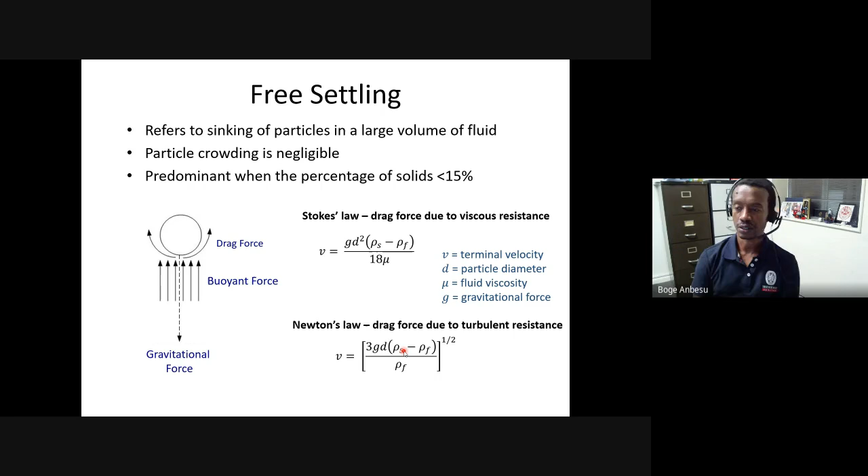The drag force can also be a result of turbulence resistance. If that's the case, then Newton's law applies, and again terminal velocity depends on size and density of the particles. So what you're trying to infer from these two expressions is how fast particles settle, which depends on either the size or the density of the particle.

If I'm only dealing with one type of particle, the density is the same, so what matters is only their size. If I have different types of particles, maybe one made from quartz, the other from pyrite, they have different densities. In that case, density will play a role in affecting the terminal velocity.

If you simplify those expressions further, maybe in this case the classifier uses water as a medium, so density of fluid is known and viscosity is known. I know the viscosity of water, I know the density of water, so basically these are numbers, and I know gravitational acceleration.

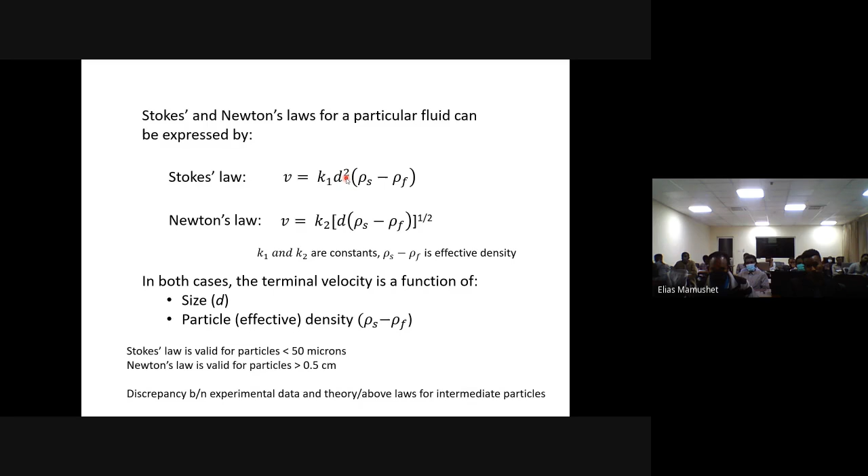So according to Stokes' law, the terminal velocity is simply a factor of the density of the solids and the particle size. The same applies for Newton's law. If I know the density of the fluid and gravitational acceleration, that expression can be simplified.

So basically, in both Stokes' law and Newton's law, terminal velocity depends on size. If particle size is large, terminal velocity is large, so particles settle faster. The same is true in Newton's law, when particles are large, terminal velocity is large, they settle faster.

The other factor is density. If particles are denser, terminal velocity is high, so density becomes critical. In any case, in both laws, the terminal velocity will depend either on the size of the particles or the density of the particles.

But over the years, people have tried to validate these expressions, and it's found that Stokes' law applies usually for particles smaller than 50 microns, and Newton's law applies for particles coarser than 0.5 centimeters. Unfortunately, most of our mineral processing operations work in between those sizes, usually around 100, 200, or 300 microns, and there is usually a big discrepancy between what these theories predict and what we actually observe in reality.

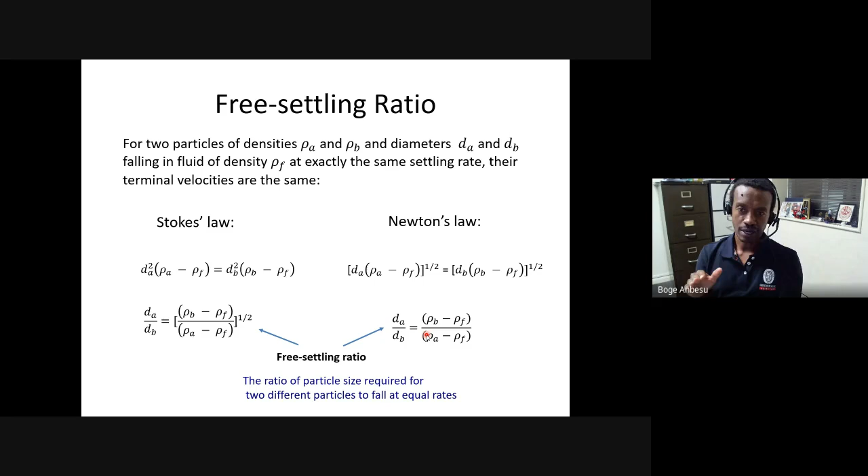What you're trying to do usually is split particles based on size only, so the density is variable while you're trying to separate them based on size, and that can present challenges. So people usually work out the ratio of sizes between one mineral and another, or between one size and another, that could help them effectively separate the particles from one another.

So for any given size, say of quartz, there obviously needs to be a sufficient size difference between one quartz particle and another to be able to separate them from one another efficiently. And that size can be determined based on what we call the free settling ratio.

Okay, so in this case, maybe you have particles with two densities and two sizes, and maybe you can assume this is suspended in water, so the density is known. So for the first particle, A, you know the size dA and the density. You can then work out Stokes law for the second particle, where again you know the size and density. This is based on these expressions here.

Okay, so if I take the ratio of one size to another, dA and dB, maybe for two different minerals with two sizes, I can work out a ratio. Based on that ratio, I can predict whether the size difference between those two particles is big enough to separate them from one another. You can do the same for Newton's law. For two particles of different density and size, you can work out settling ratios, and the settling ratio can give you insights into possibilities during separation from one another.

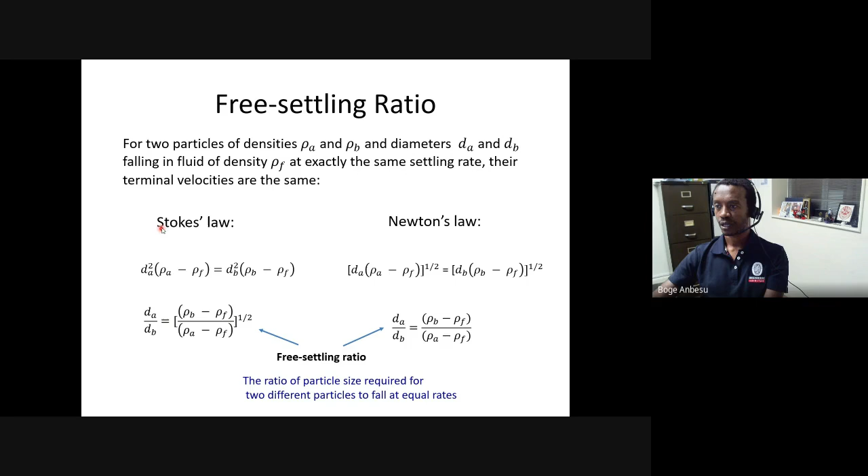Maybe this example will help explain what I'm talking about. So if you have a mixture of galena with specific gravity of about 7.5 and quartz with specific gravity of about 2.7, and let's say both are being classified in water, you can work out the free settling ratio of those two particles based on these expressions, if Stokes law applied for smaller particles, or Newton's law for coarser particles. So based on that ratio, the free settling ratio between quartz and galena is about 1.96 based on density, if I apply Stokes law.

So basically for smaller particles. And if I apply Newton's law, the free settling ratio of quartz to galena is about 3.82. So what does that mean? It means if I have quartz and galena in one mixture at about a 1.96 size difference, times the size difference, both particles will start to fall at pretty much the same rate.

Now I know galena is denser and quartz is lighter. So if the particles were the same size, I know the galena will sink first, there's no question about it, because it's denser. But what I want to know is, now I have, say, 100 micron galena. Would 125 micron quartz sink at the same rate as the 100 micron galena? That's what I want to know.

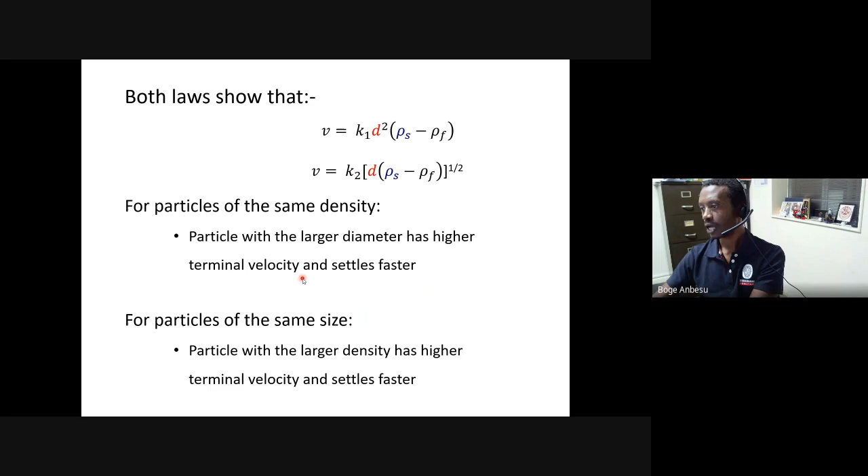Because in my separator, I have both of them, and in this case I know the densities are different, and therefore based on density here, either the density or the size is what's critical. So if particles are the same size, the density will play a role. If particles are the same density, then the particle size plays a role.

But in this example, since quartz and galena have different densities, they have different settling rates. What I want to know is, now I have a particle of galena that's 100 micron. If the quartz is also 100 micron, the galena will fall first and settle first. But how about if the quartz was 125, 150 micron, and the galena was 100 micron? Which one settles first? Just because the quartz was larger doesn't necessarily mean it settles first, because it's actually lighter. So even if it is coarser, it doesn't mean it settles quicker.

So I need to know the size ratio that is optimum, or the size ratio that tells me galena needs to be this size and quartz needs to be this size to be able to separate them from one another. That's actually obtained using the settling ratio. After calculating the settling ratio of 1.96, a small particle of galena will settle at the same rate as a particle of quartz that is 1.96 times larger, so in this case almost 2 times larger. So if I have 100 micron galena, it falls at the same rate as 200 micron quartz. Although the quartz is double the size of the galena, it doesn't necessarily mean it settles faster.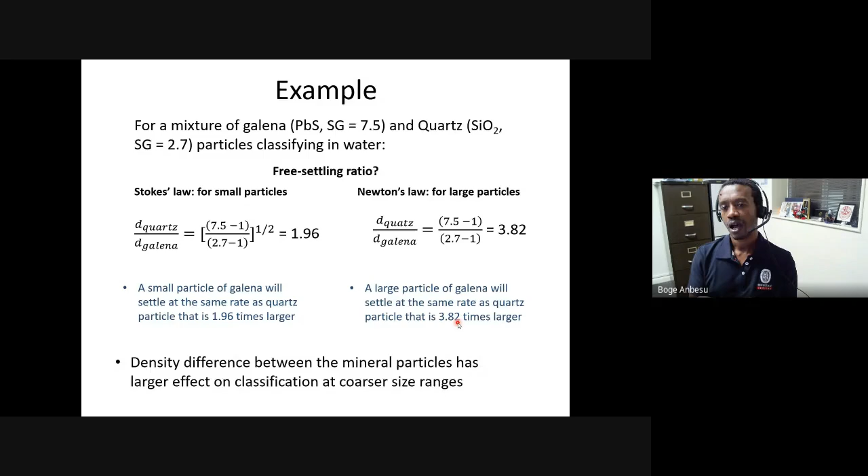Now, how about if I was actually dealing with larger particles, say 5 millimeter particles? In that case, most likely Newton's law applies. But in that case, the galena and the quartz need to be about 4 times difference in size between the two for them to fall at the same rate. If the galena was 5 millimeters in size, for quartz to settle at the same rate, it needs to be almost 4 times that size. So maybe 5 millimeters of galena and 20 millimeters of quartz have the same settling rates. If the quartz is smaller than 20 millimeters, the galena is always going to sink first. So already this settling ratio is telling me possibilities. So when I plan my classification, I already have these calculations in mind. I can already predict how well my classifier is going to perform based on the proportion of the particles I have, their size, and the corresponding densities.

The free settling case is obviously a case where particles are not really overloading the separator. As I mentioned, we're talking about maybe less than 15% solids, but usually we might want to push the separator a bit harder. I want to work at 30% solids, 40% solids, even up to 70% solids. When that is the case, then you have what we call a hindered settling condition. In this case, particle-to-particle interaction is very high. There's interaction between the particles, and therefore particles don't settle very quickly because particles collide with one another. They prevent one another from settling.

So in this case, instead of assuming water as a media, you can actually assume the pulp itself as the media in which the particles are suspended. If you look at the previous example, we're looking at fluid as a medium, but in the hindered settling case, we're actually looking at the pulp as a medium. So instead of fluid density, we're looking at pulp density. In any case, this is a hindered settling condition where particles are overcrowded. There's high density, high pulp viscosity condition, and a lot of turbulence. So particles will settle at a lower rate, and we can use a modified Newton's law for this, where the terminal velocity is dependent on the size and not only the density of the particles, but also the density of the pulp.

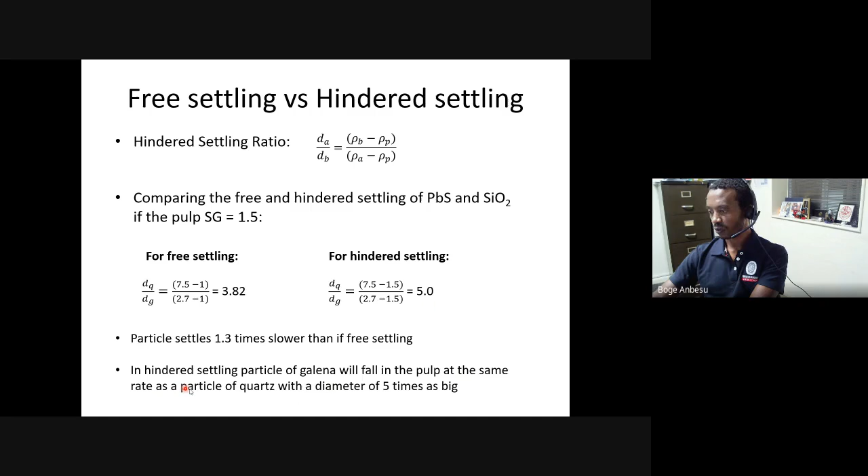Again, we can do the same for hindered settling conditions. And for hindered settling conditions with two particles of different sizes and different densities, you can go back to the same example, lead and quartz, as we did earlier. But instead of using water, I used 1 for the density of water. Now maybe the pulp is not of density 1, maybe it's 1.5 grams per centimeter cubed, so the specific gravity is about 1.5. Then you can do the same calculations. For free settling, Newton's law predicts a ratio of 3.82, but in the hindered settling case, it's about 5. This is actually the impact of crowding the pulp with higher percent solids. What it's saying is when you have a hindered settling condition, particles will move slower compared to free settling condition, and therefore there will be a lot of differences in terms of the impact of density and size on separation performance. So in hindered settling condition, a particle of galena will fall in the pulp at the same rate as a particle of quartz about 5 times more in size.

So when people design classifiers, in case of hindered settling, you want to increase the effect of density on the classifier. In this case, what we're saying is the particles are uniform in size, but the density is different, so I want to explore that. Maybe you can look at beach sand deposits. When you go to the beach and dig sand, particles are actually very uniform in size, but they're made from different densities because they're different minerals. You can actually run a higher percent solid hindered settling condition.

In that case, the particle size is very comparable, so the main way of exploring separation should be density, and you can maximize that by creating a hindered settling condition. But in a case where particles are uniform in density, maybe you're trying to separate a silicate from another silicate, particles may be of different sizes, so size effect can be maximized in the case of a free settling classifier.

So I will talk about different types of classifiers next week and how we can operate them, and some of the factors that affect classifier performance and so on. I thought I'd just give you a brief about that this week.

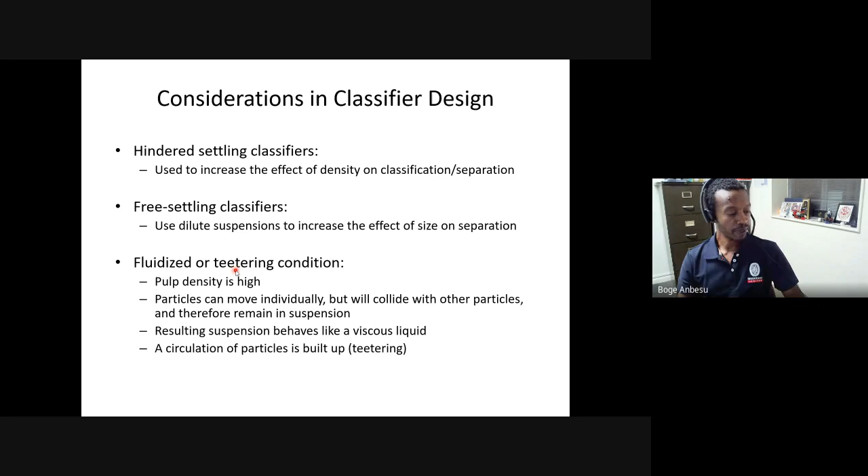Probably one of the main equipment used for classification is a hydrocyclone, and I'll talk about a hydrocyclone and its operation next week, so no stress about it for now.

I think that is it for today. I will probably talk briefly about your assignment and how you can complete it, but before that, anyone with a question?

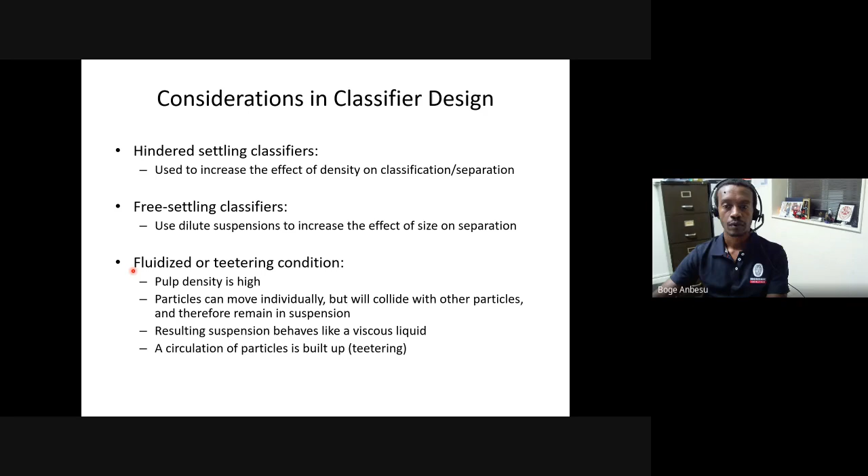Any question on this one? No question? Okay.

So I understand there's a bit of confusion on the assignment and how to complete it, especially part one. Okay, so I'll probably share it.